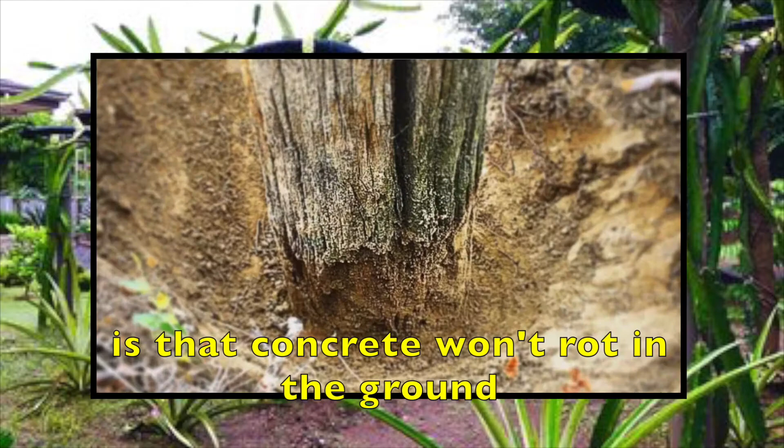There are several ways you can build this support, with different designs and different types of materials you can use. But in this video, we will concentrate on the type made of a concrete post with a used motorbike tire on top. The advantage of using concrete instead of wood for the post is that concrete won't rot in the ground and won't require nasty chemical treatment against termites. Concrete is also stronger and more durable than wood.

Strength and durability are very important for dragon fruit trellises, especially in the Philippines, which is frequently visited by typhoons. Each plant can produce fruits for as long as 20 to 30 years, so its support should be strong and durable enough to last that long.

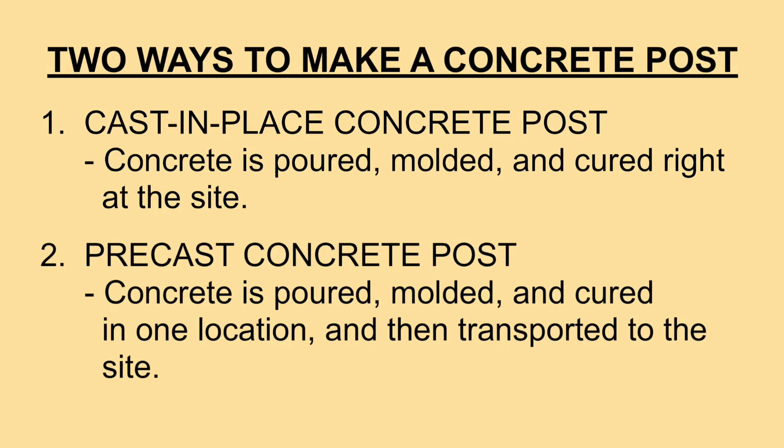There are two ways you can make a concrete post. You can either cast it in place or have it precast. Cast-in-place concrete is poured, molded, and cured right at the site. On the other hand, precast concrete is poured, molded, and cured in one location and then transported to the site. This picture shows details of a trellis made with a cast-in-place concrete post.

As shown in the bill of materials, this would require about 3 cubic feet of concrete, 1 used motorbike tire, and 1 10mm or number 3 rebar with a total length of 9 meters or 30 feet. The post should be about 1.5 to 1.8 meters, or 5 to 6 feet high from the ground.

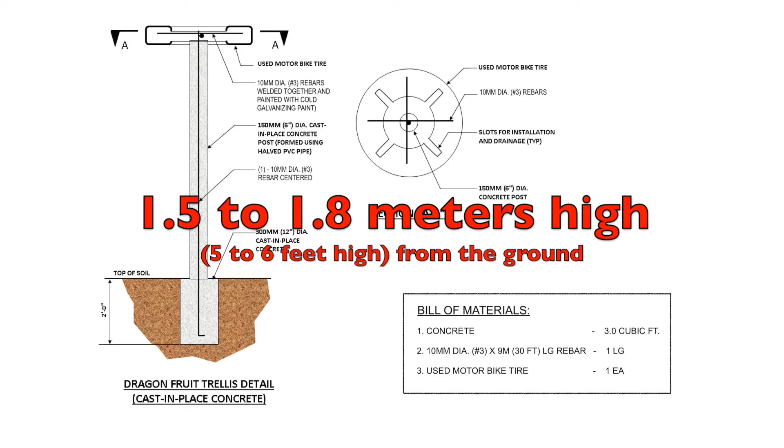To construct this, you would need to dig a hole 2 feet deep from the ground. Pour the foundation with a 10mm or number 3 rebar doweled into it. Pour the post using halved 6-inch diameter PVC pipes as molds. Tie the molds together with ropes or wires and provide temporary supports as necessary.

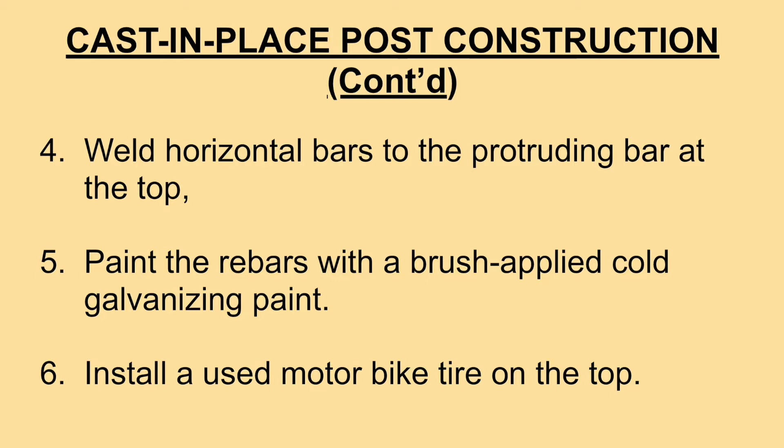Weld horizontal bars to the protruding bar at the top. Paint the rebars with a cold galvanizing paint. And finally, install a used motorcycle tire on top.

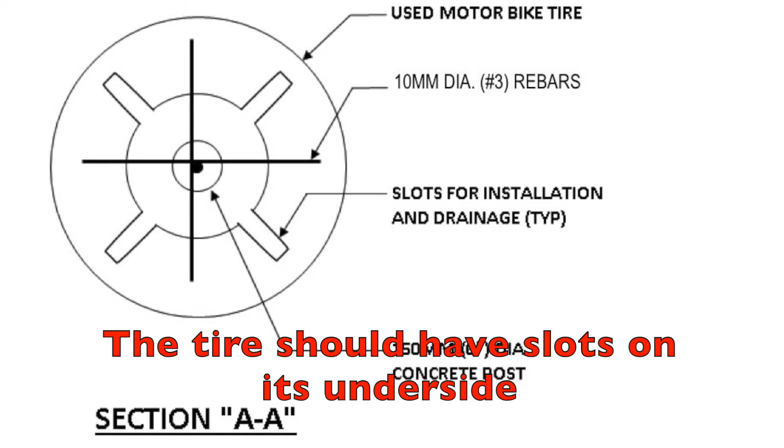The tire should have slots on its underside to facilitate installation and for drainage. Of course, you wouldn't want the tire to collect water, which could become breeding grounds for mosquitoes. The tire is provided to protect the vine when it comes to the top of the trellis and hangs over. It would prevent the sharp edges of concrete and the rebar corrugations from cutting into the fleshy stems of the dragon fruit vine.

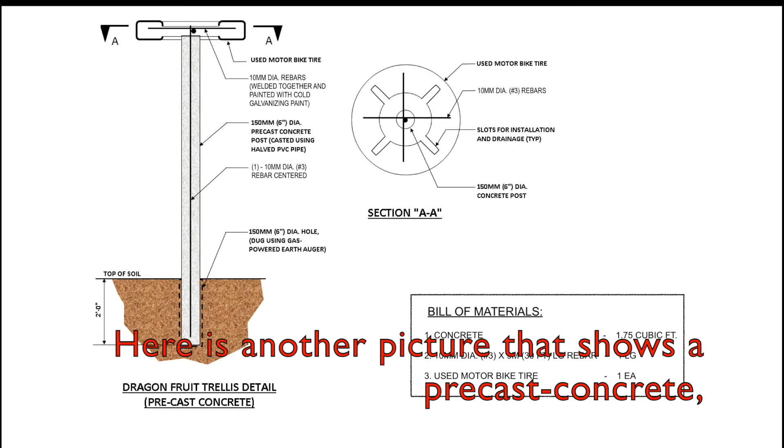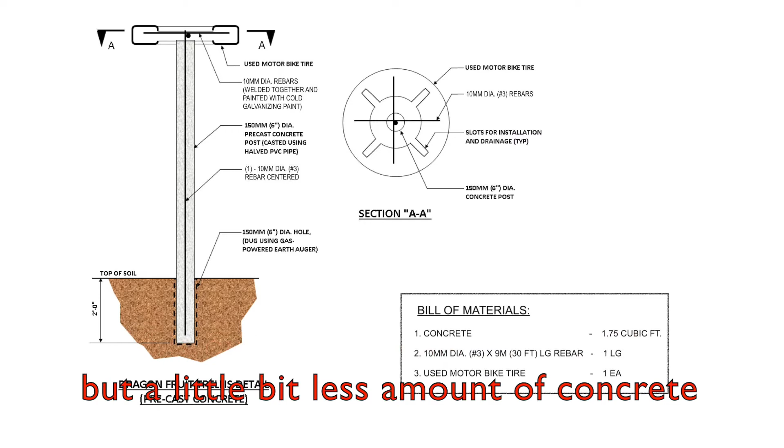Here is another picture that shows a precast concrete instead of cast-in-place concrete post. This can be installed directly into an augured hole on the ground. This one would require the same materials but a little bit less concrete, just about 1.75 cubic feet. For large-scale projects, this may be the better option of the two, mainly due to faster installation.

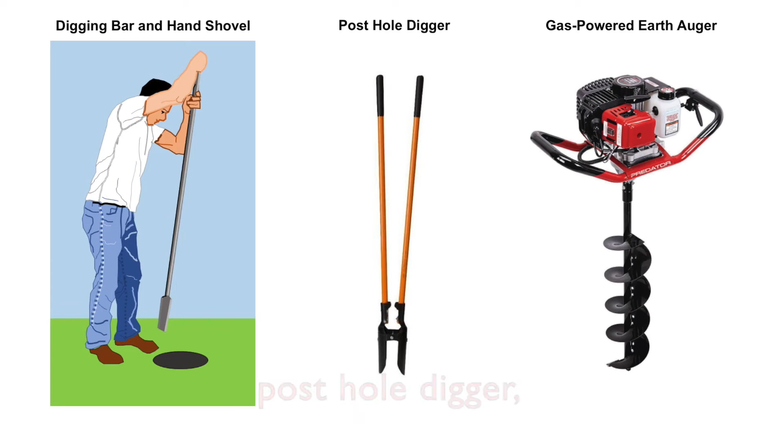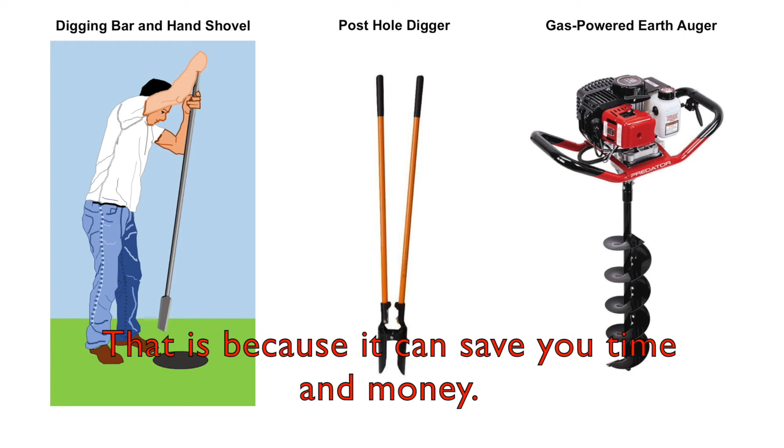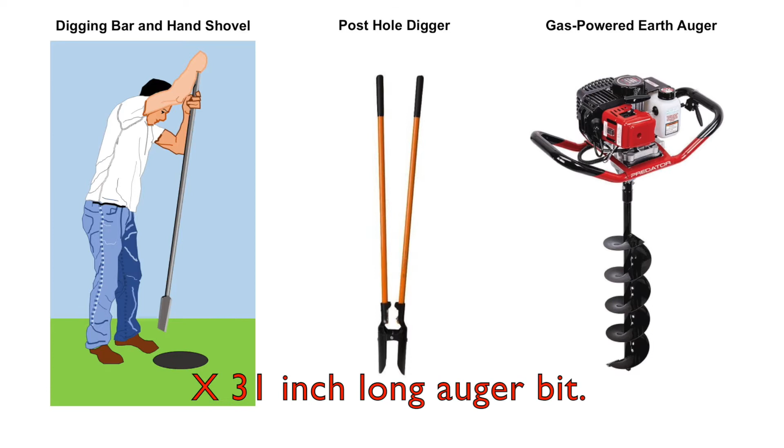To dig the holes, you may need one or more of the following: digging bar and hand shovel, post hole digger, or gas-powered earth auger. I personally recommend using a gas-powered earth auger together with precast concrete posts for large-scale dragon fruit plantation projects, because it can save you time and money. The gas-powered earth auger shown in the picture costs around $186 to $220 and comes with a 6-inch diameter by 31-inch long auger bit. It can easily be operated by one person.

You can either buy one or rent one. Rental tools are available, for example, at the Home Depot Tool Rental Center.

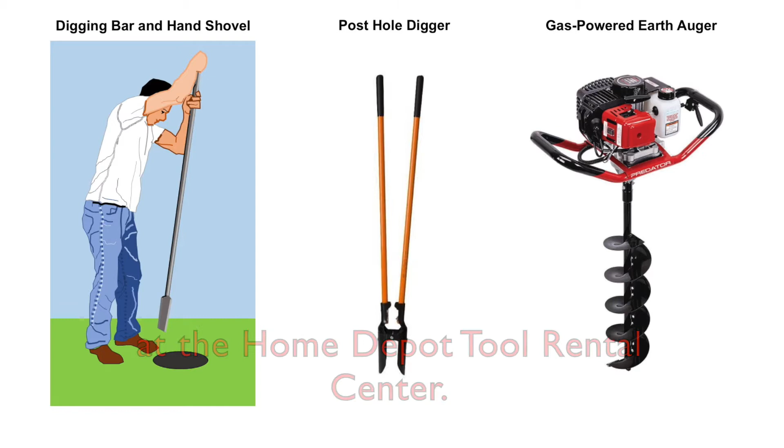So basically, there are 3 main steps. First, you have to dig a hole. Second, you have to construct or install the post. And the last one is to install the used tire.

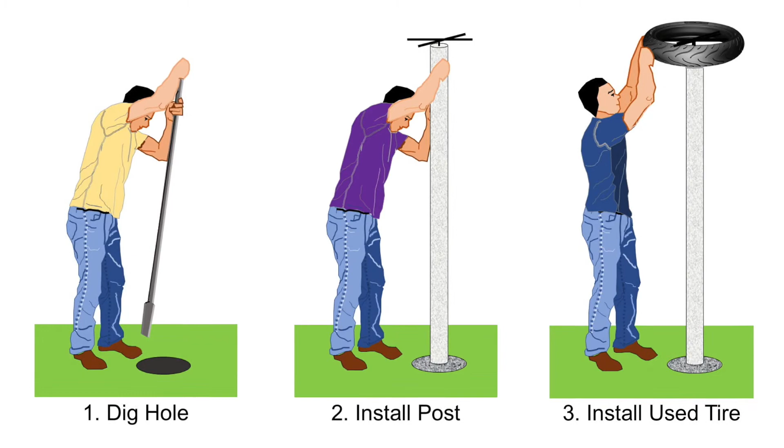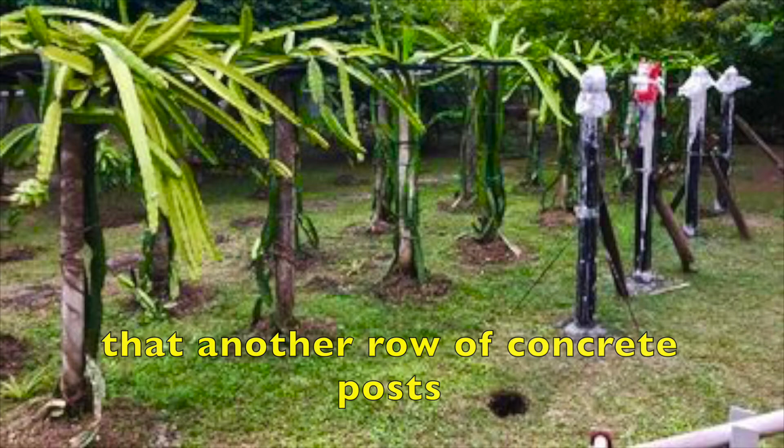But in this picture, you can see that another row of concrete posts had just been poured. The PVC pipes that were used as molds had not been taken out by the time this picture was taken.